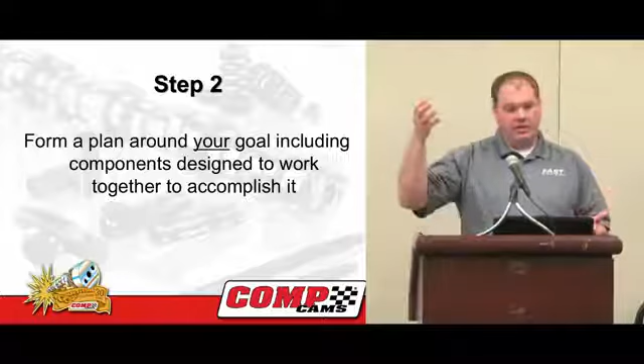Well, you hit on something: compromises, and that's what it's all about. With everything in life, there's a cost for every benefit, and the most important thing that we can do is explain those compromises to you. Then the user has to make the choice: what's important to him, what does he mind sacrificing. You can never have your cake and eat it too. We would all like to think that. But what we can do is help you make good compromises, and you want to lean all those towards the things that are the most important to you.

I don't know of a specific set of guidelines, but there's a lot of publications and a lot of things out there that will help you define those, and we're going to go over a lot of them today. And by the way, feel free to interrupt me and ask any question. The more interaction we have, the better this presentation is for all of us.

As she said, I'm part of the Comp Performance group, and within our group, Comp Cams is obviously the leader of our group. We've got 6 other companies that fall within the umbrella of the Comp Performance group, so we're able to do cross-engineering between a lot of these brands, which allows us to develop a lot of components that work well with each other.

So I want to go over, before we get started, a little bit of our engineering department, how we develop and design the parts and products that we sell. This is a list of some of our engineering resources. We have 15 dedicated full-time research engineers that design, test, and develop products, with full engine and chassis dynamometers, as well as Spintron fixtures for complete valve train dynamics.

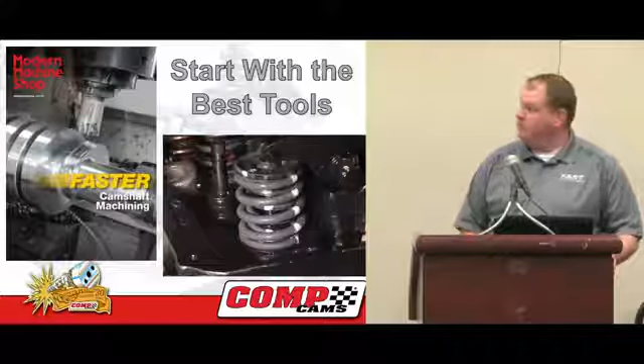This is our banks of CNC cam grinders. By being able to program these, they're able to grind much more accurate, duplicate a lot better, and hold tighter tolerances than manual grinders can.

Only custom grinds? Some of the part number grinds, but as far as each cam, custom grinds, yes sir.

So this is a picture of the Spintron machine. This is a big block Ford Hemi-headed Jon Kaase engine, and there's no crankshaft—there's only a mandrel that drives the valve train. But it has a full valve train, and we're able to spin it up at very, very high speeds that running an engine just wouldn't allow us to analyze what's going on.

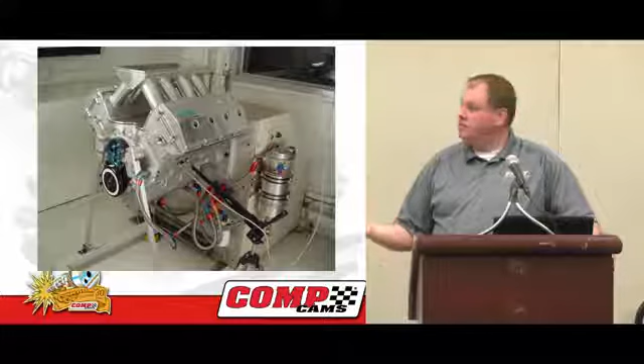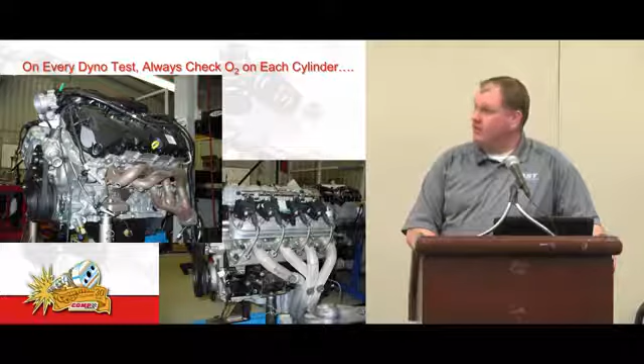A couple of our test engines. There's a Coyote Ford 4-valve overhead cam engine on the left. On the right is one of the LS families of engines. You see the O2 bungs in the exhaust header, so we're checking individual O2 readings on every cylinder during dyno tests.

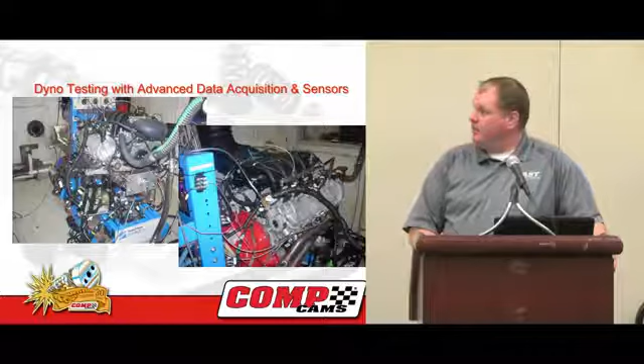So what we want to talk about for just a second is changes this decade, what we've seen change in the valve train world. More aggressive lobe designs—in other words, how quickly we're opening and closing the valves. Machines like the Spintron have allowed us to push the envelope of how quickly we can open and close the valve while still keeping it under control. Aggressive cam profiles are nothing new, but to be able to make them aggressive while not losing control of the valve train and without having harmonics that damage parts—that's where we're going, that's where we're moving ahead.

Large cam cores, 55 millimeter—what we found is the bigger the journals, the bigger we can make the barrel, the cam is much stiffer. So if the cam's stiffer, it flexes less. You have less damage, you have more accurate control of the valves.

Very stiff rocker arms and push rods. The use of strain gauges on push rods in the Spintron machine have allowed us to actually measure the deflection of the push rods while they're at very high RPMs, and it's taught us the value of really thick, stiff push rods. Actually, the additional weight is worth it to gain the stability.

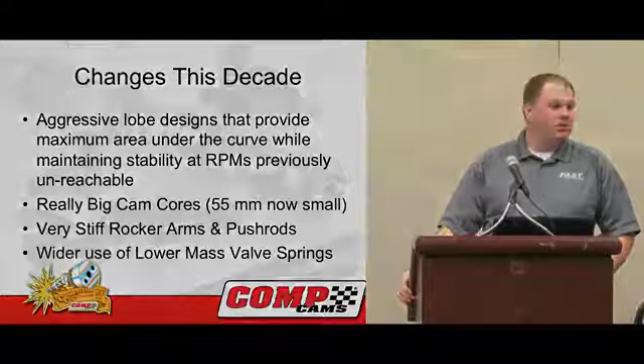Good questions. So the question was, with a beehive spring, since you don't have a backup spring, if the spring fails, it's a total loss of control, whereas with a double spring, at least you have one spring still holding it. That was the question. So it's all about the application.

OEMs, since about '96, all they use are beehive springs. But that's a stock vehicle. In a full race vehicle, there's not very many places I would say a beehive spring would be an appropriate choice. There are places where we use them in race vehicles, but where are you using the lighter springs? Well, like Cup, for instance.

We were just talking about using the lighter springs, to use the lighter weight on that side of the valve, and I understand all that, but how are you getting the lighter spring? Well, part of it is the material of the spring and the diameter, the actual weight of the spring itself.

Using smaller diameter wire? That's part of it. They're using different shapes, they're using oval shaped wire. And also we've experimented with the profile of the retainers.

Now we're using tool steel, which is a lot cheaper than titanium, but you can really cut down the amount of material. By using computer analysis, we've been able to figure out where it needs to be thick and where it doesn't matter. In the places where it doesn't matter, we're taking material out, so we're able to come up with a lot lighter retainer and even reduce the overall outside diameter.

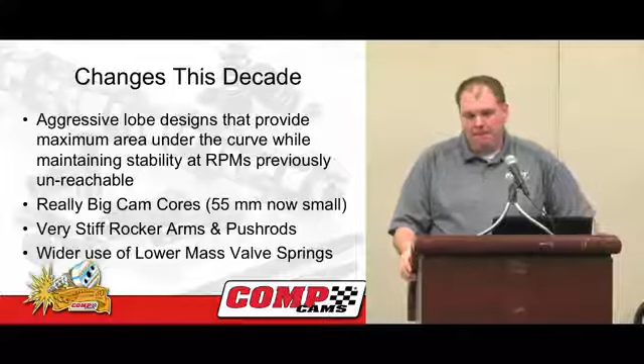Do you get the tool steel retainer lighter than the titanium? It's about equal for less than half the cost. Also, it has some benefits because titanium will gall over time and tool steel just doesn't do that. It's a lot more resilient and it lasts a lot longer.

Titanium, if you put them side by side, might be slightly lighter, but in most cases, most of our customers are opting for the tool steel for the value. It's just a much better piece for, like I say, about half the cost. Well, for every gram, you pick up 30 to 40 RPM.

Just in general, if you take two identical pieces, tool steel versus titanium, the problem is it wouldn't be the same piece. Because tool steel is so much stronger, we can make the piece smaller and be equally as strong as a titanium piece. So it's hard to compare two identical pieces because we would never make that. With tool steel, we're going to carve more material out because it's stronger and we can, and that gets the weight really close to titanium. But if you want the absolute lightest, titanium is still the lightest thing available.

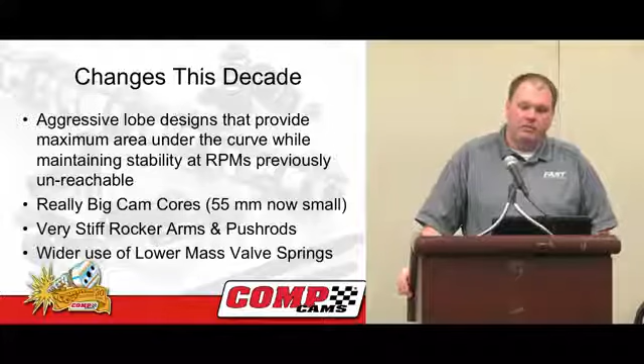Any other questions on springs? Okay.

So other changes this decade, particularly in OEM applications, far more widespread use of overhead cam. We saw the 4-valve Ford engine in the picture a moment ago. That engine is very, very impressive as far as power output - a very close to stock engine can make 500 horsepower at the crank with 302 cubic inches. That's impressive, that's very impressive. This year's Engine Masters Challenge, there were 3 overhead cam engines, and they finished 1, 2, 3. So there's a lot of advantage to be found with overhead cam applications.

Increased adaptation of variable valve timing. All the OEMs are using variable valve timing now, so you can retard the cam when it needs to be retarded and advance it when it needs to be advanced. You can gain a lot of mid-range torque with that. Not so much of a deal in a race application, but in street-driven or hot rods, there's some advantages to be found. And measuring of system stiffness.

As we were talking about before with the Spintron, we're able to really measure how much things are flexing under actual engine operating conditions. That's helped us figure out where we can improve things. It's easy to just make push rods a lot thicker and bigger in diameter, or make rocker arms bigger and heavier, but that's really ineffective. We're looking at how we can improve the strength and the stiffness while maintaining a good value and also being conscious of the weight. The question was, how are we dealing with the problem of stiffness in overhead cams?

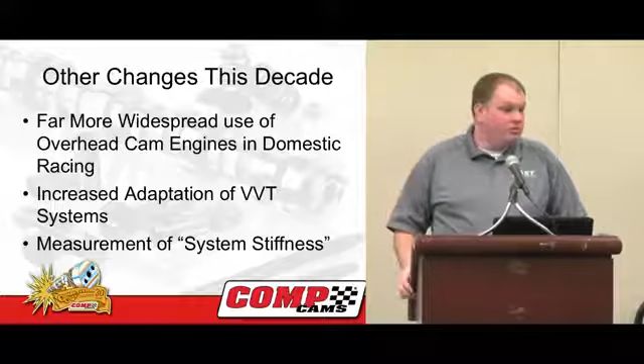That's one of the benefits of overhead cams - there's no push rods, there's essentially no lifters. You're basically either pushing directly on the top of a valve or on a rocker arm. So stiffness really is not an issue in overhead cam - that's the big advantage of it. You've taken a lot of those pieces out of the chain, and high RPMs are achievable. 9,000 RPM with a completely stock valve train is not an issue. Specifically the Coyote Fords, I've dealt personally with a few of those, and 9,000, 9,500 RPMs in a stock eliminator engine with stock rockers, stock lifters, obviously upgraded springs, but for the most part a stock valve train.

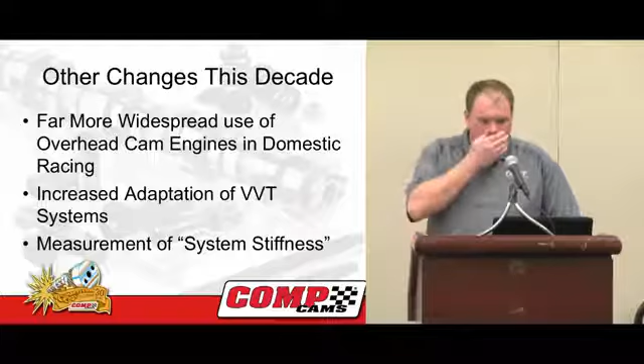So a couple of things, we got a new lobe catalog. Now there's a lot of lobe designs that weren't previously available to the public - they were only available for race teams. We've got a complete catalog now.

Updated steel retainer profiles we were talking about. Basically, we've redesigned our retainers to get maximum strength with minimum weight for a good value. Yes, sir - are those new tool steel retainers in the catalog yet? Yes, they are in our catalog. They were actually introduced at SEMA before last, so yeah, they're definitely in our current catalog. Designated as such in the catalog? They are, and if you look at any of the retainers, it'll typically reference the tool steel equivalent. So if you're looking at titanium, it'll reference the tool steel equivalent.

Continued expansion of the gold rockers. The gold aluminum rockers are a line that's done really well. It gives, for a good value, a good strong rocker arm. For the money, it's a really good piece.

Short travel hydraulic roller lifters - that's what we were talking about earlier. These are hydraulic lifters that have minimum travel and they act more like a solid. They complement very well with our aggressive hydraulic roller profiles, so it'll allow you basically to have a race engine with hydraulic lifters. Not only do you not have to adjust them as often as you would a solid, but there's some real advantages to a hydraulic lifter right off the seat. A lot of people think solid roller is the ultimate race, and it is.

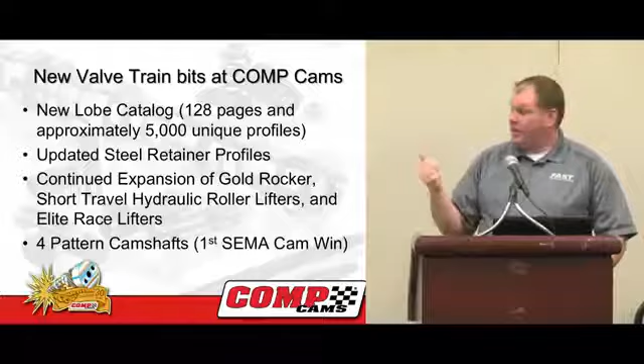Okay, 4-pattern camshafts—these were introduced at SEMA, and actually won an engineering award at SEMA this year. Basically, if you look at the manifold in the shot, you can see the two outer runners are obviously a good bit longer than the two inner runners. And for years we've done this, where a cam is actually ground with different duration on the inboard cylinders versus the outboards.

Race teams have done this for a long time because with the outboard runners, you need a little bit more duration to get equal cylinder filling, since the air has longer to travel. So we call it a 4-pattern cam because when it's ground, they basically grind the 4 outboard lobes for the 4 outboard cylinders, then reset the machine and grind the 4 inboards. We used to use different ratio rockers back in the day—same exact thing.

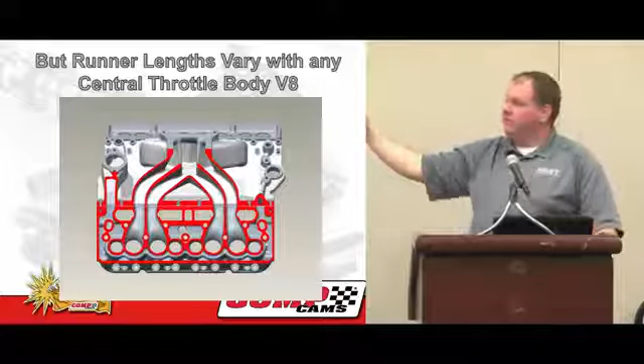Are those patterns different for the exhaust side too? No, because with the exhaust you've got a header, and hopefully the tubes are pretty equal in length. His question was if the exhaust lobes were spread, and the answer's no—it's strictly dealing with this intake design. So here's a better image of the longer path on a Chevy or Chrysler, cylinders 1, 2, 7, and 8, versus the inboard cylinders. What we found is you can typically run a shorter duration cam—you can make an engine come in sooner and run out farther if the cylinders are balanced, versus trying to make a compromise for one or the other.

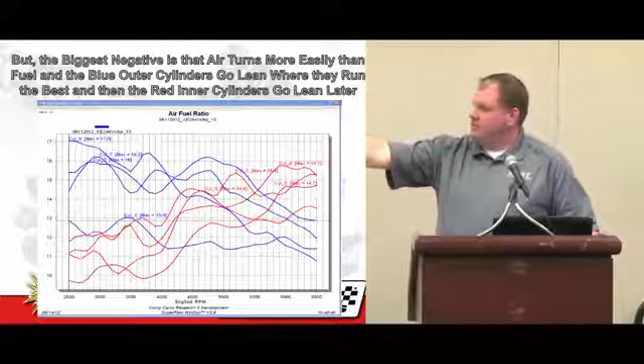So here's a graph with the O2 sensor readings. The blue cylinders are outer and the red are inner. You can see the outer cylinders are a lot leaner, because in a carbureted application, less air means less fuel to the outer 4 corners. You can see they get closer as they go, and that's because as any engine approaches peak torque, everything balances out and gets more efficient. Then you can see the outer ones go rich at the end while the inner cylinders go lean, so everything's just jumbled up.

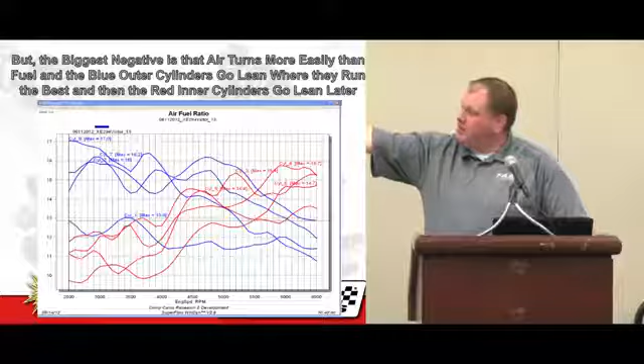So by balancing it out, you can see that at the top we picked up some additional power and torque, and right at the very bottom it came in a little bit sooner. Overall, it gains across the board.

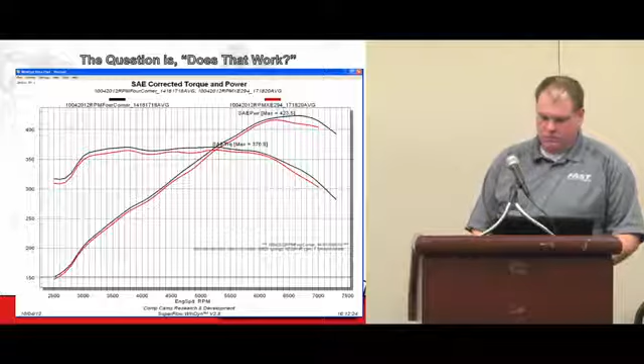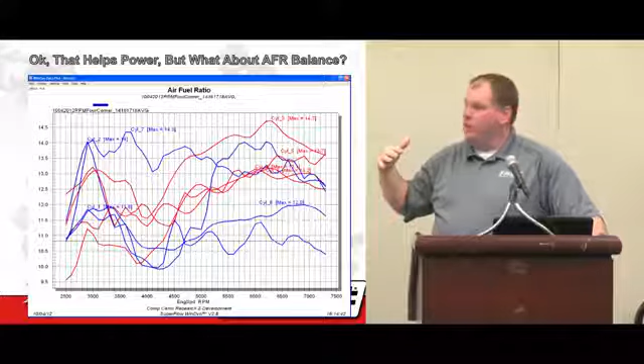So the O2 sensors here—now this is a single plane intake manifold. Even though the O2 readings are still all over the place, there's no clear pattern. The outers and inners are not favored one over the other anymore. So that previous one was a dual plane, this is a single plane, and you can see the gains were substantial.

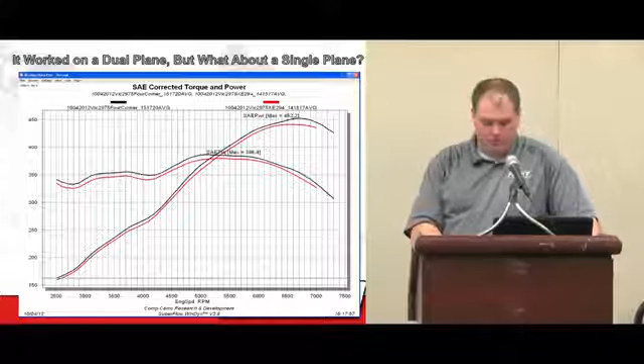Red line being inboard cylinders, blue line being outboard cylinders.

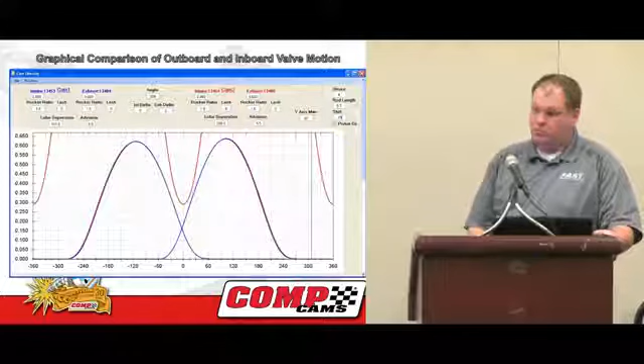So why use a 4-pattern camshaft? Better air-fuel cylinder balance, 1 to 2% increased power for most manifolds. And what we found is the better the cylinder head, the more gains this allowed.

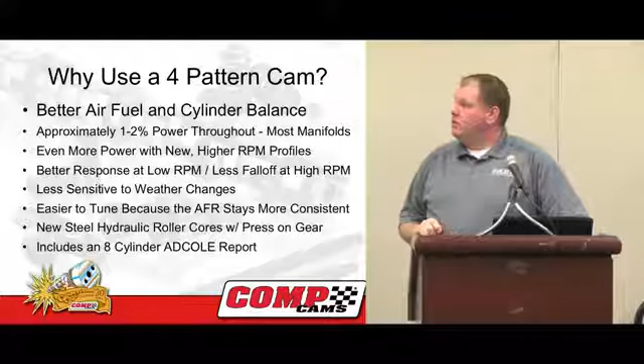Better response at low RPM, less fall off at high RPM, less sensitive to weather changes, easier to tune. And the ADCOLE machine I showed you, all the 4-pattern cams include an 8-cylinder report, so you actually get the report with that cam showing every cylinder's profile.

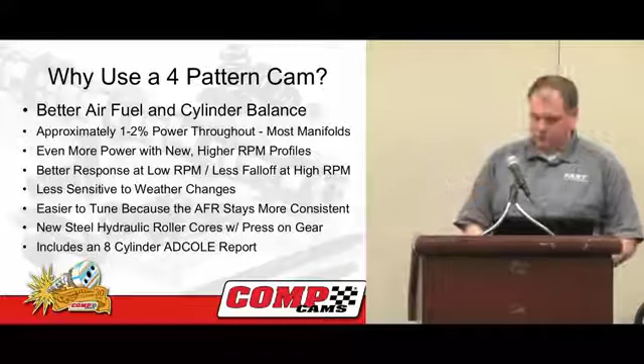So what took us so long to introduce 4-pattern cams? Even though we were doing it behind the scenes for years, most teams thought they were the only ones that knew about this. But almost every Cup team, and a lot of the Comp Eliminator NHRA teams, use this technology. But they're very difficult to grind because you've got to reset the machine twice. They're more complicated to run through QC because it's basically like checking two different cams on one core.

Any questions about 4-pattern cams?

Okay, so this is the latest technology in valve springs. We talked about the beehive springs earlier, and for anybody that's not familiar with that, it's basically a spring that's straight near the bottom, it rounds off, and it mimics the shape of a beehive. It's not new technology, beehive springs have been around for a long time.

The newest technology is our conical spring. It's got a consistent change in diameter from the bottom to the top. They're very difficult to wind, basically the production of these springs is very difficult because of the way the machines have to wind the springs, but we've developed technology that'll consistently produce spring shapes.

So if you think about a pyramid, there's nothing more stable than the pyramid. All the mass is at the very bottom, no mass at the top, and that's the same thing we're going for here. The retainers are very small in diameter, so you don't need as much spring. Right now we're working on a dual conical spring for race applications.

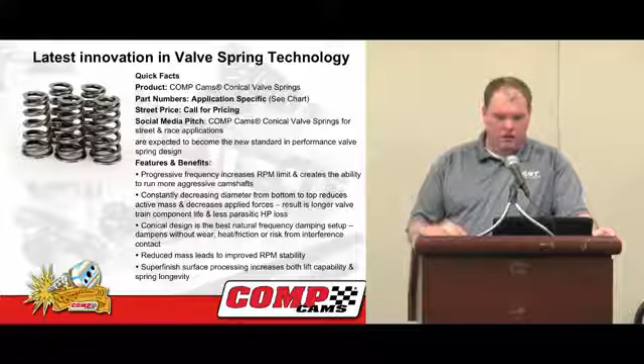We've also got 3 different options on the lobe of that pump. So if you want to increase the output of the fuel pump, since it's mechanically driven, it's controlled by the lobe. We've got lobes that increase the fuel pump capacity up to 40%.

These do require custom tuning because they do increase the output of the fuel pump. This is the first hot rod piece for the new LT1 Chevy engine. We can work with active fuel management and variable valve timing with this particular engine.

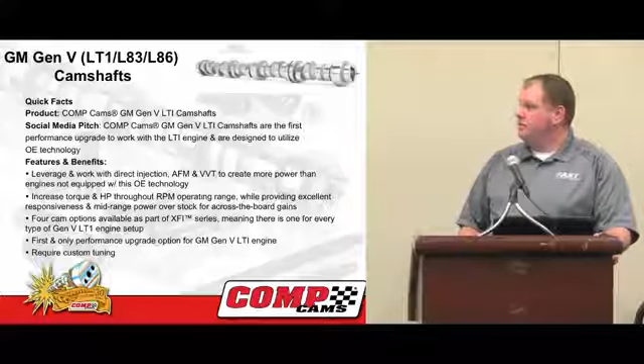And our new Sportsman series of solid roller lifters. We've basically got a good, a better, and a best on the lifter. We've got our Elite Race lifters, we've got our Endure-X lifters that we've had for years and years with good success. This is a middle-of-the-road, great value lifter for the money.

These are available with both needle bearings and with a bronze bushing on the axle. A lot of customers prefer the bronze bushing, a lot prefer the needle bearing, so we decided to offer both options. The lifter's lighter than the previous lifter. The axle's tool steel, so it's stronger, and it's got revised oiling there. It's actually pressure-fed oiling to both sides of the axle straight to the needles, because lack of oil to the needles is the most common cause of failure in a solid roller lifter.

You don't make those all in-house? Yes, well, not in-house, but they're at a facility specifically for us.

Any other questions about Sportsman lifters?

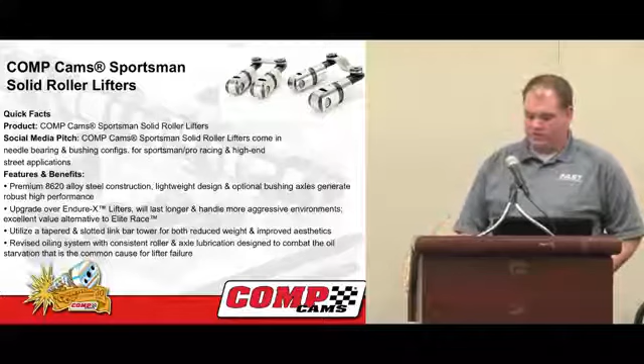All right, now the fun starts. What are the questions?